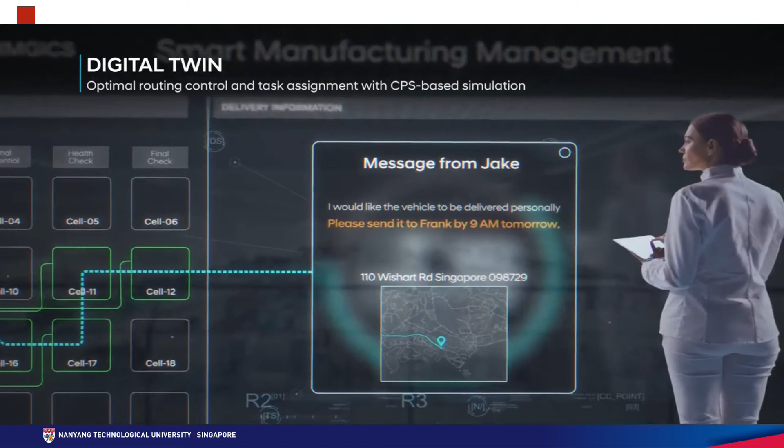The previous video provided one example of how to utilize digital twin. In future, customers definitely want more smart and individualized products. So the company definitely needs this kind of capability to support this customer need.

For example, reduce time to market significantly, enhance flexibility in manufacturing system, increase quality of products, overall operation efficiency, and definitely increase security. For this, most companies are utilizing digital twin.

This is more about reducing asset downtime, optimizing process time, and as mentioned before, reducing time to market.

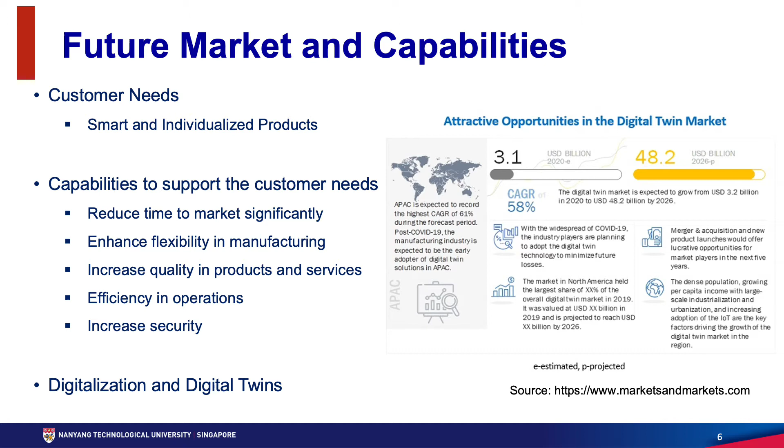Therefore, digital twin technology is very attractive to a lot of different industries. This figure provides examples of pre and post COVID-19 scenarios in the digital twin market. Definitely, after the COVID-19 pandemic, we are looking more toward digital twin technologies.

Here are some applications in different industries. General Electric is developing engines for aircraft. They're utilizing digital twin and digital manufacturing for developing smart factories. Siemens is one of the software companies providing relevant technology in digital twin. They utilize digital twin in three different phases: digital twin products, production, and performance.

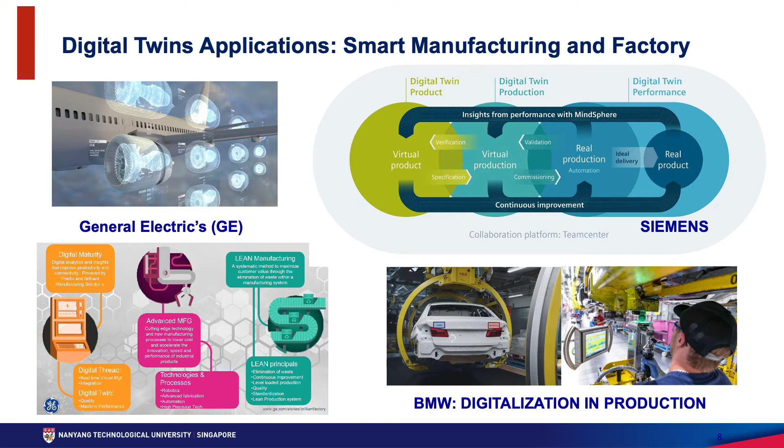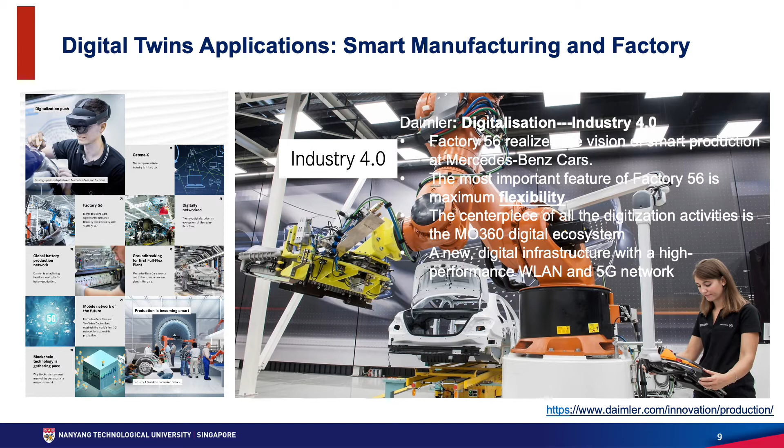One example is BMW, an automotive industry company. They also utilize the digital twin concept in their production system. Another example, Mercedes-Benz is utilizing digital twin to maximize flexibility in the production line. Finally, they're developing new digital infrastructure utilizing the 5G network as well.

Digital twin technology applied to smart city is our lifestyle. One report says by 2025, some 500 cities all over the world will be utilizing this digital twin concept. Also, in the UK, the government in 2018 established the National Digital Twin Program to develop national digital twins.

So far, we've discussed one application of digital twin. Digital twin can play a key role in combining related physical and virtual entities into a more efficient cyber-physical production system. To implement the digital twin, digitalization, interoperability, and collaborative networking should be achieved in progress towards smart factory and city. So for digital twin, we need three components.

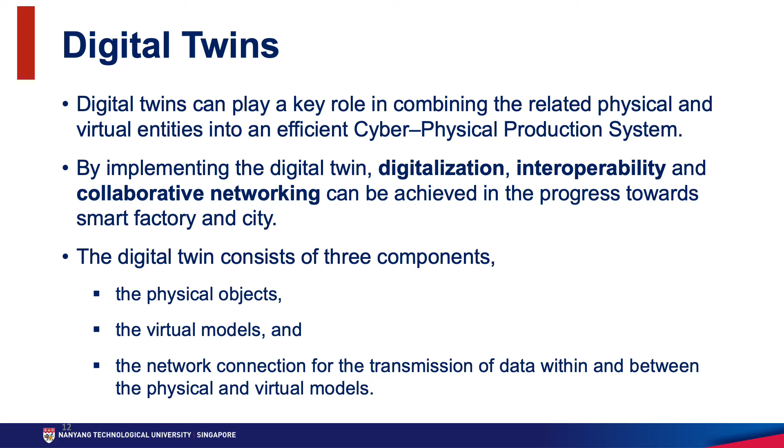One of them is physical objects and virtual models. Also, network connection between physical and virtual models.

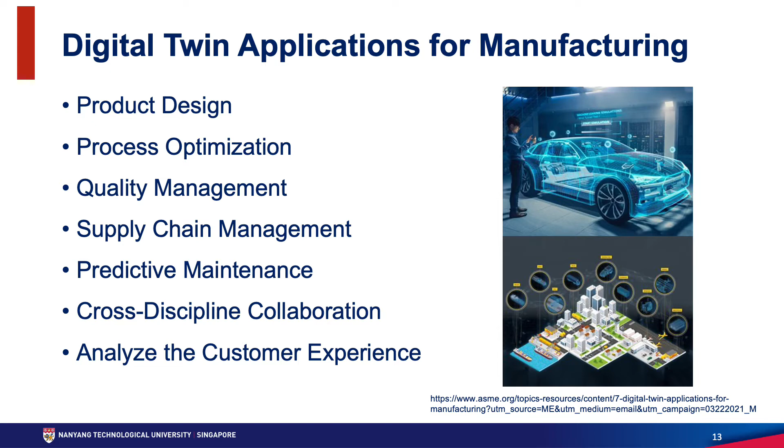Here are applications, especially in the manufacturing area. One is design, process optimization, quality management, supply chain, predictive maintenance, and collaborations. Also, analyzing the customer experience. This application is very important to developing more customized, smart, individual products. So this is the requirement definitely needed by our future customers.

So what kind of benefit comes from digital twin? As you can see, digital twin provides cyber-physical systems. So we can provide more real-time monitoring and control that can be extended to a lot of systems. Also, we increase efficiency and safety as well. Safety is more important to our employees and operators in our smart factory environment.

Also, predictive maintenance schedules supported by early fault detection. As you can see, all the smart factory works by sensors, so we can easily understand what kind of problem particular machines have. Also, this provides scenario risk assessment, efficiency, and well-informed decision making. This is one example of real-time decision making we have. So we can gain a lot of different benefits utilizing digital twin as well as the smart city.

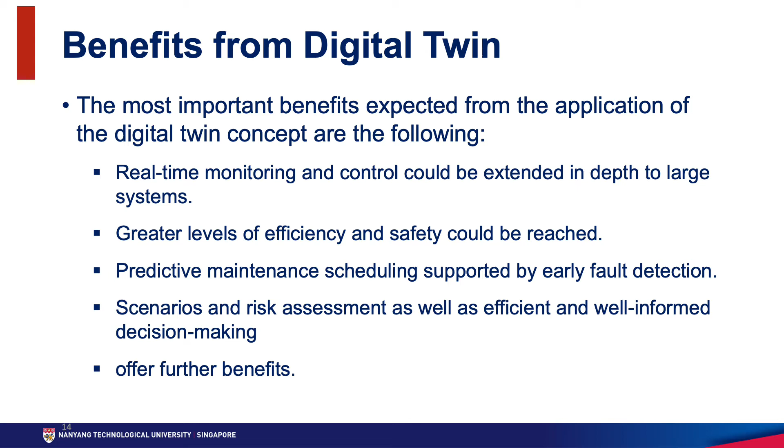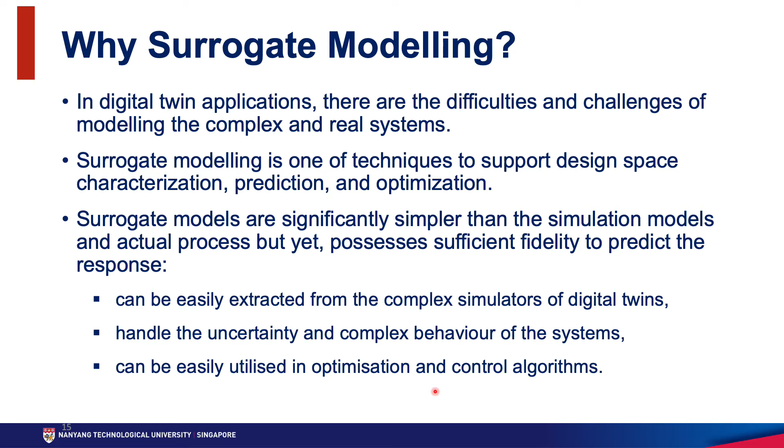In digital twin applications, there is difficulty and challenge in modeling complex and real systems. To overcome this issue, surrogate modeling is one technique to support design space characterization, prediction, and optimization. Surrogate models are significantly simpler than simulation models and actual processes, but yet possess sufficient fidelity to predict the response. So we can easily extract from complex simulations of digital twins, also handle uncertainty and complex behavior of systems, and easily utilize optimization control algorithms through the surrogate modeling process.

A surrogate model is developed as a statistical model to accurately approximate simulation output. The trained statistical model can be deployed to replace the original computer simulation in performing sensitivity analysis, optimization, or risk analysis.

This is a special case of supervised learning applied in the field of engineering design, where we apply this especially for developing surrogate models.

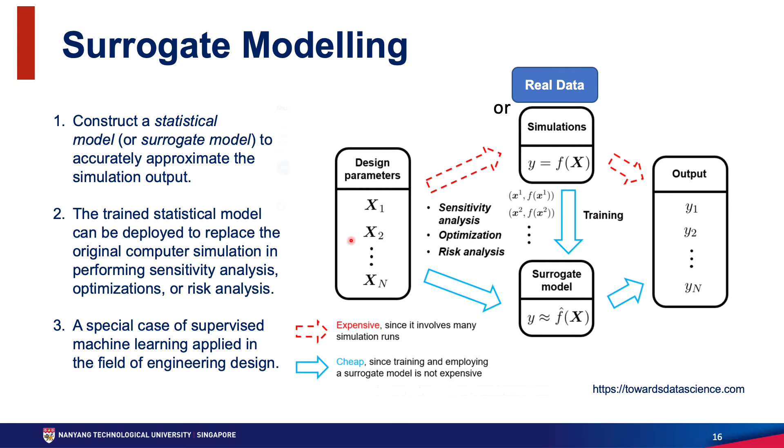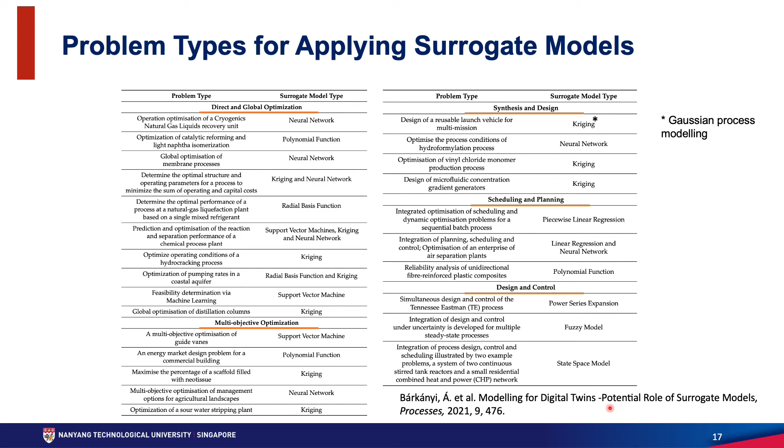As you can see in the previous slide, there are many different types of surrogate models. So depending on the problem, a particular kind of model can be adapted. Here is the process of building a surrogate model.

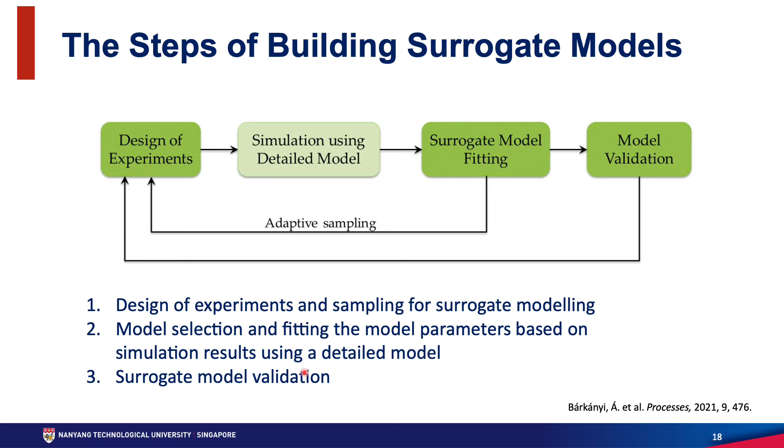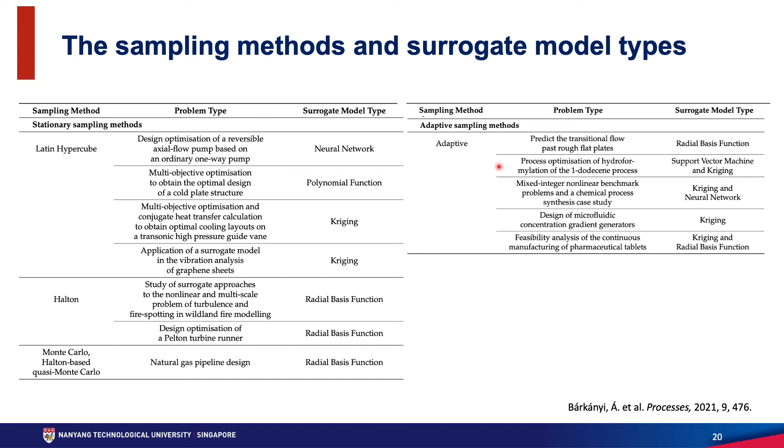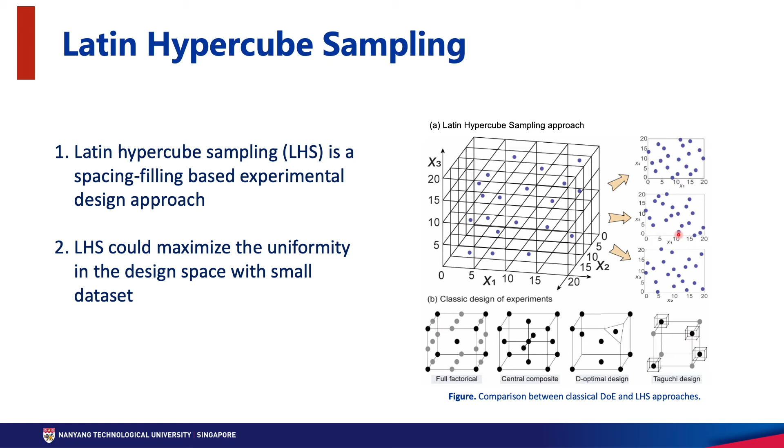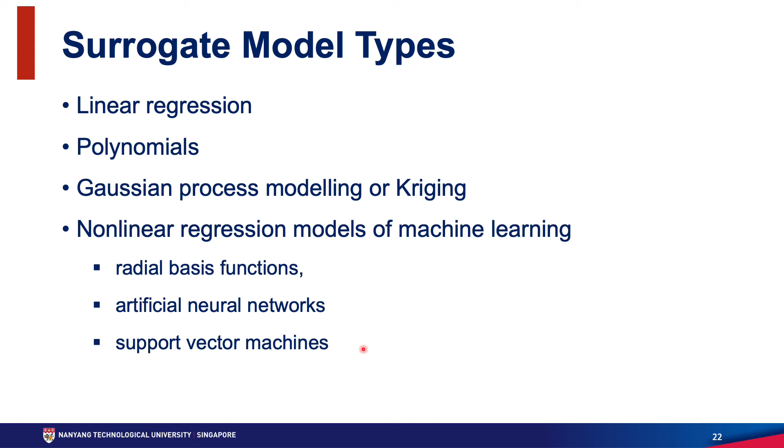Here are different types of surrogate models. As mentioned before, one of them is linear regression, polynomials, Gaussian process modeling, or Kriging. Also, nonlinear regression models from machine learning can be applied for developing surrogate models. Radial basis functions, artificial neural networks, or support vector machines can be used for developing surrogate models.

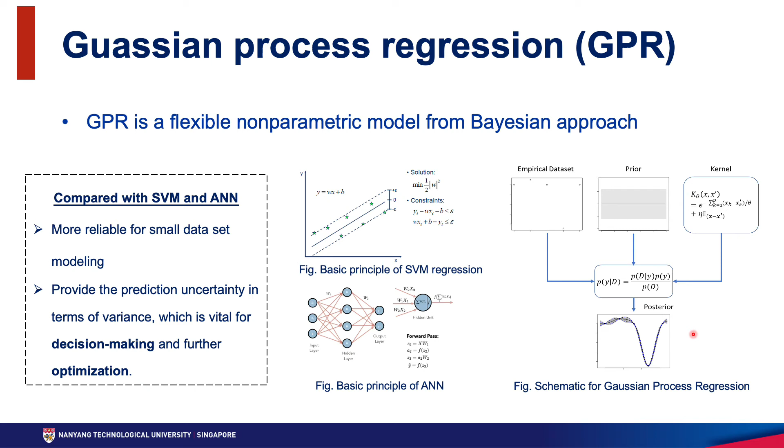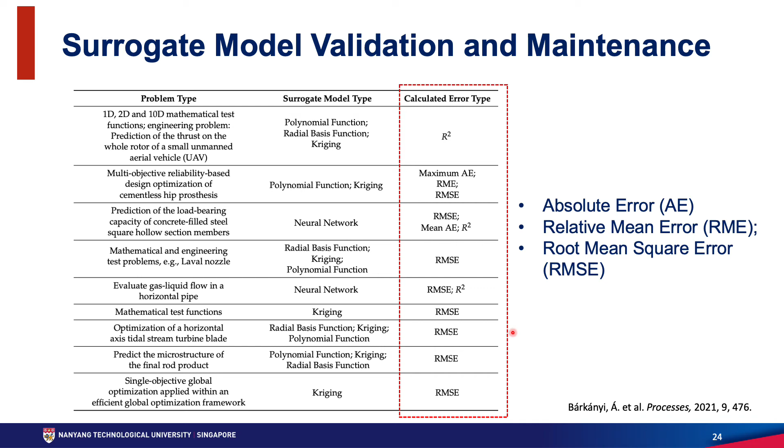After establishing the surrogate model, one of the important processes is validation and maintenance. To validate the proposed model, we utilize absolute error, relative mean error, or root mean square error as part of a validation process.

In developing a surrogate model, we have limitations and challenges. For example, it is very difficult to decide the best cutoff value, especially for R square. How much is the value best adapted to a particular problem? Also, this model may not be equally good for all data points.

Another reason is bias in data. The bias is reflected in model predictions. Also, poor generalization to unknown problems can affect the accuracy of the surrogate model.

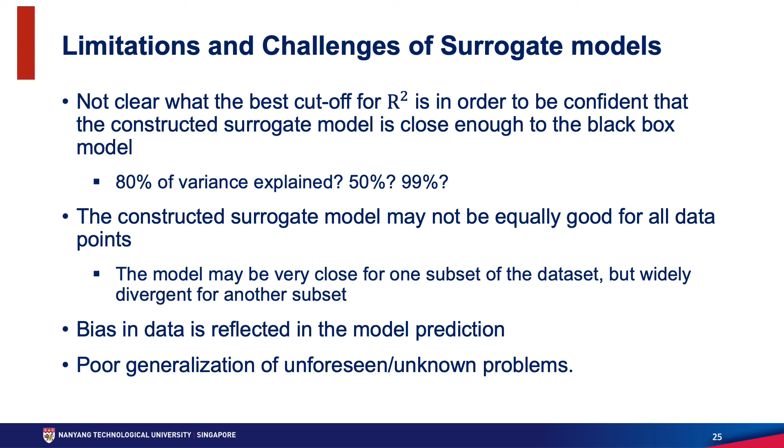So far we discussed how to develop a surrogate model. For the case study, I'll give you an example of how to develop a surrogate model, especially to predict production performance using input parameters from production planning. This case study applies to developing a digital twin in smart manufacturing systems.

We are utilizing three categories of parameters: the current production system load, machine-based, and production-based parameters. For the surrogate model, we select multivariate adaptive regression splines. This research is based on this paper. Please let me know if you're interested in more details of this research.

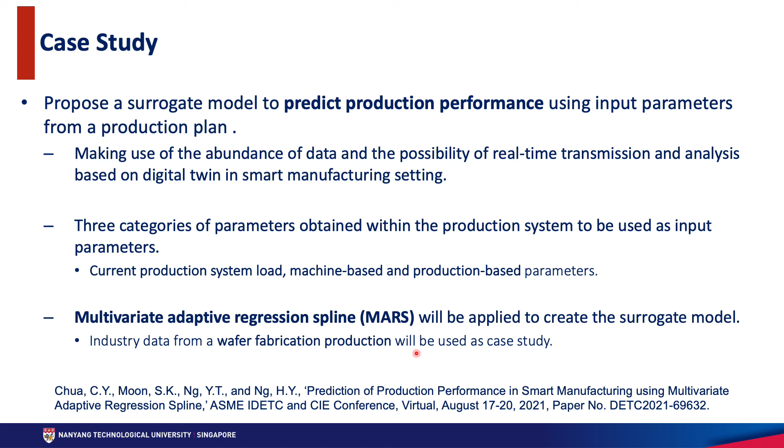This figure shows how to implement the digital twin in a smart factory. The digital production system provides more detailed modeling and a particular machine learning process. Also, the physical platform provides more real data, like real sensors or a particular robot embedded computer. All the data goes into the database, then we need to utilize this data to develop the algorithm to implement the digital twin.

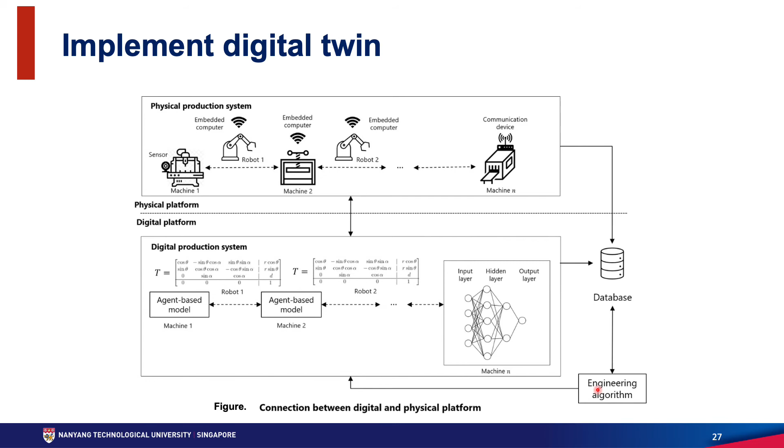This figure provides more detailed information on data flow in the digital twin, especially the decision support system in the database. In the decision support system, we apply to developing a surrogate model. As mentioned before, we utilize production data, machine data, and performance data to predict production performance.

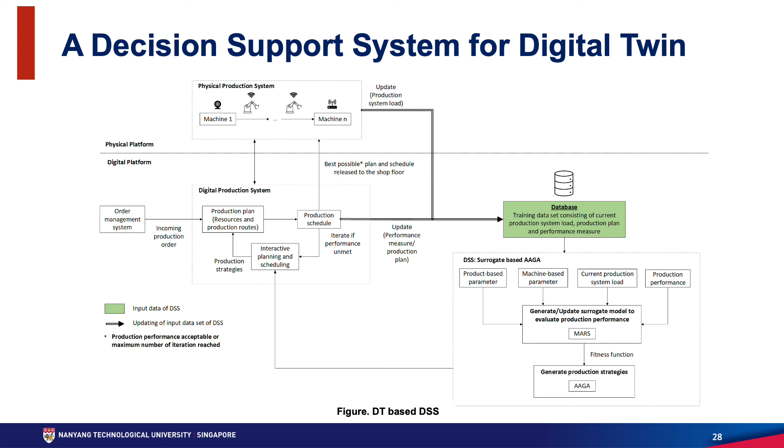To develop the surrogate model, we need to train the model. For the training phase, we consolidate the data from the full evaluation of the production plan and schedule. There are two different systems.

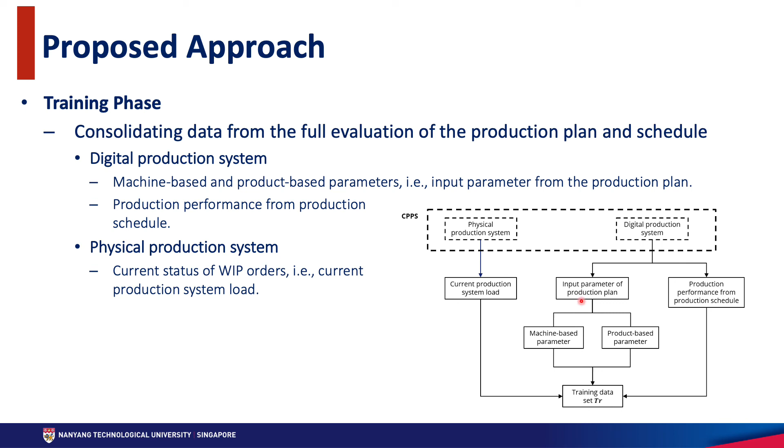One of them is the digital production system, the other is the physical production system. The physical production system is the current state of the WIP order, for example the current production system load. For the digital production system, we need machine-based and product-based parameters. For this, we utilize input parameters from production plans and production schedules.

After we train the data set, we start the surrogate model generation. We apply a particular regression model, then finish the model generation.

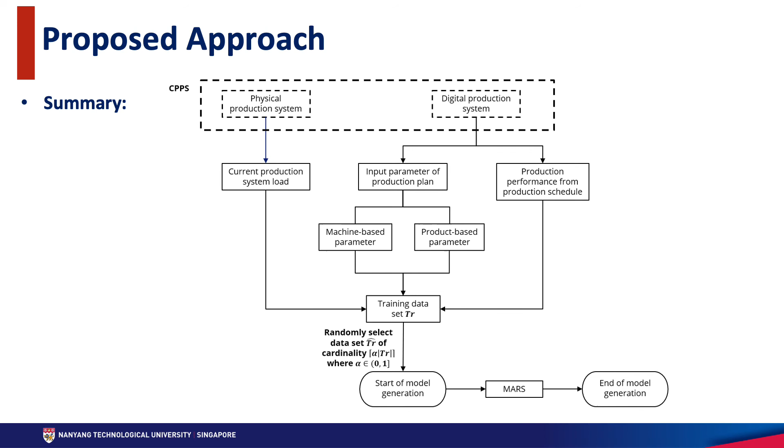Next, in developing the surrogate model, I will discuss what kind of variables are used for this problem. Especially for the input predictor variable for current production system load, we use the average number of WIP lots, also the average mean routing step.

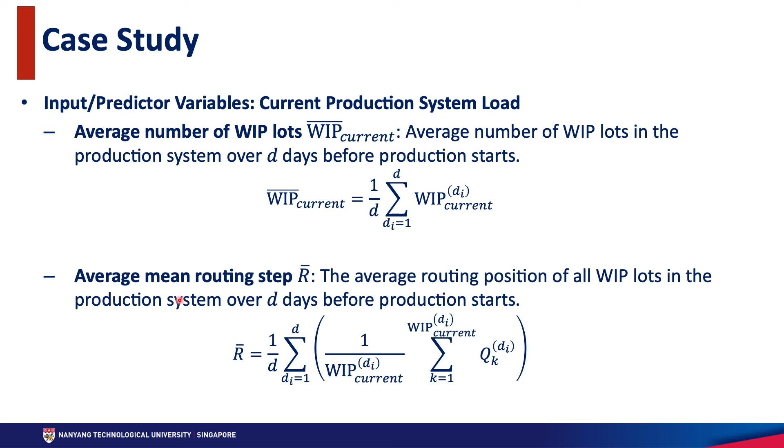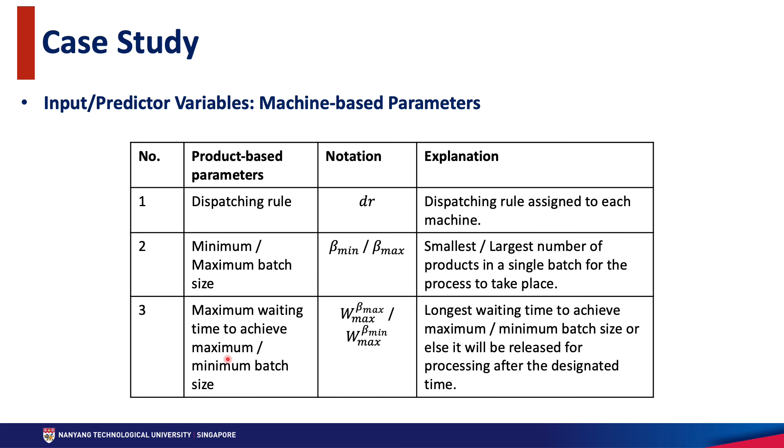In terms of machine-based parameters, we use the dispatching rule, minimum and maximum batch sizes, and maximum waiting time to achieve minimum batch sizes.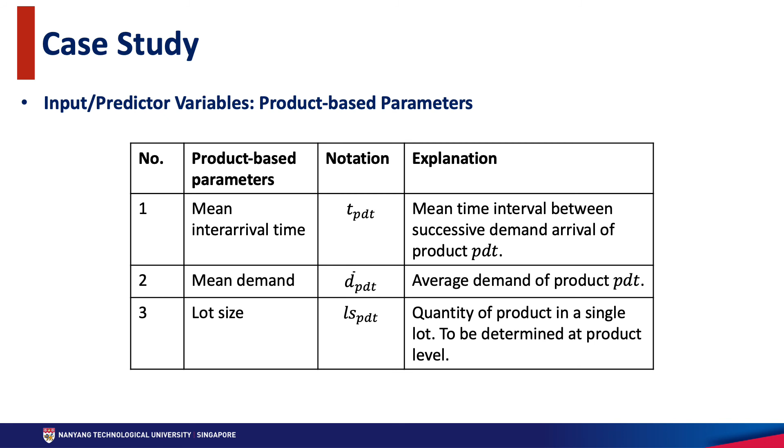In this research, we utilize historical data, and we also use simulation to obtain the predicted performance data. For this research, we utilize Tecnomatix, which is a Siemens Plant Simulation.

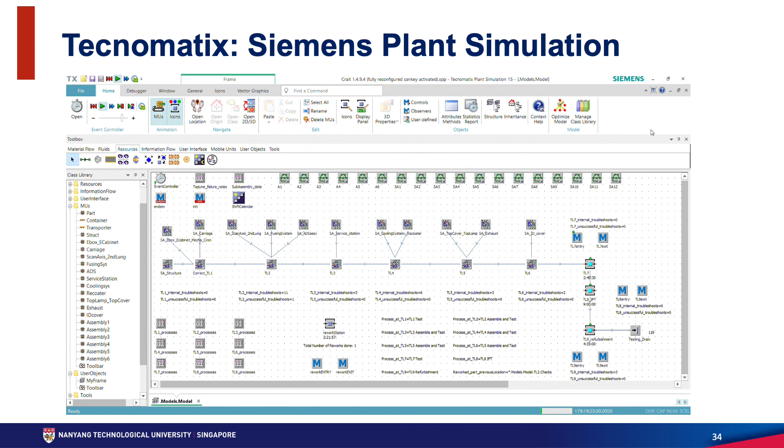For the output variable, we use performance measures. To predict performance measures, we utilize three metrics. One of them is flowtime, which represents the time the production order remains within the production system during production and queuing stages. Tardiness is the lateness of the production order. Machine utilization is the proportion of time the machine is being loaded or in processing stages.

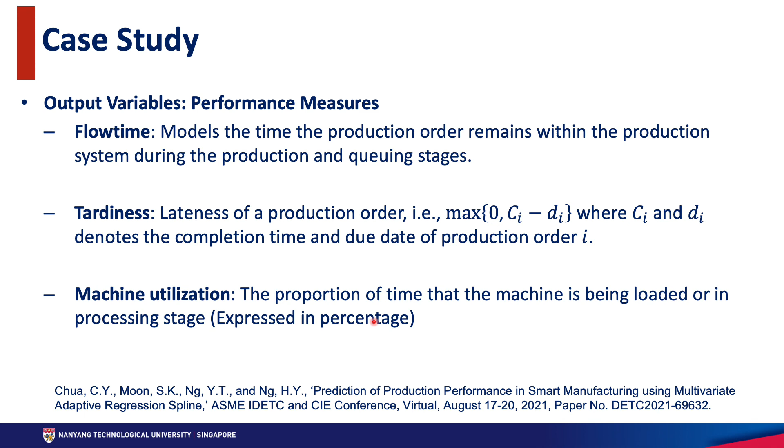So today's presentation just briefly covered how to develop a surrogate model for a particular case study, focusing on what kind of input and output data we use. For more detailed information, please let me know or refer to these conference papers.

Today's presentation discussed what a digital twin is, especially under Industry 4.0, developed to provide more customized, personalized products utilizing a more flexible manufacturing environment. We also discussed applications in smart factories, different industries, and smart cities.

And then we discussed the surrogate model, how to develop this surrogate model step by step. We also discussed what kinds of surrogate model types apply to particular problems, and we learned through the case study how to develop a surrogate model.

Especially, we focused on the production system, how to predict product performance, what kind of inputs to use, and how to utilize existing data as well as simulation data.